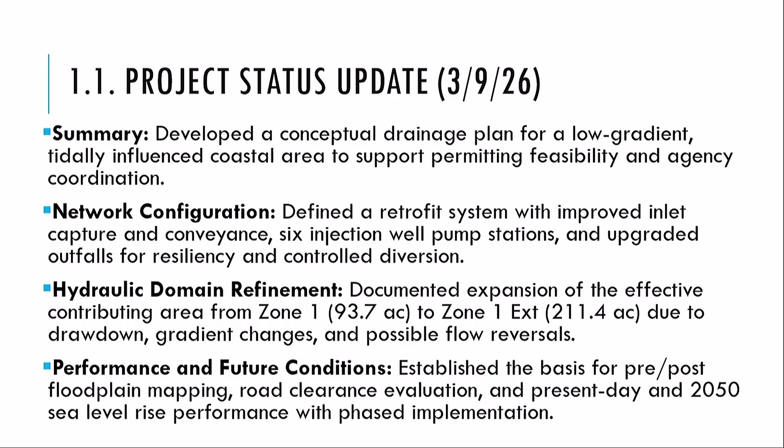And the model includes the tidal effects. The tidal complicates things, but it also helps—at high tide you have more flooding, but within less than 4 hours the tidal starts receding, which helps the drainage. So it does both things within 12 hours: it increases the flooding, but it also releases the flooding.

The project timeline, briefly: our ongoing tasks are currently the phasing and implementation strategy. This involves also constructability, how the phases can be managed, and we also started working on the cost management. The cost management, we have two approaches.

First, we needed to have more detailed information about the items that are involved, different valves, different pipes, different sizes, the dimensions. Right now we already have this information, and we are able to proceed with the costs.

And we have two ways to approach this. We can compare with the AECOM, the original analysis from 2024. Probably it's good to compare that as well, but we also adjust for the current prices. So we will end up with two sets of numbers, which are going to be time sensitive.

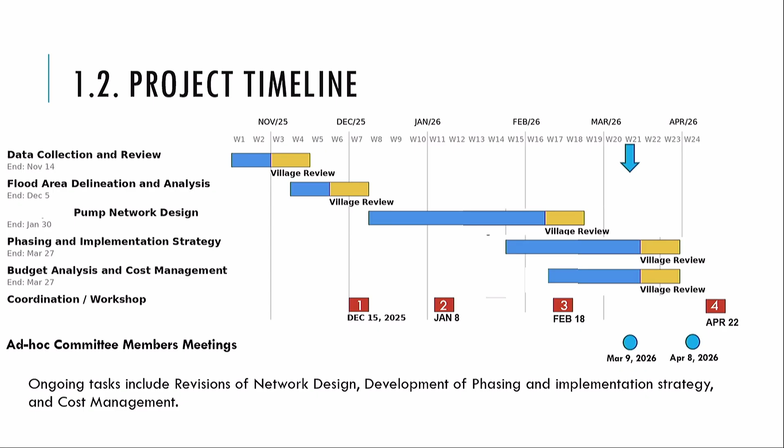We have another ad hoc meeting on April 8th, when we will be done with the cost analysis, and then the final presentation will be on April 22. So we're currently in these two processes, phasing and budget analysis.

One illustration I wanted to show you: there are multiple elements in this stormwater master plan. There is conveyance enhancements, collection improvements, where the catch basins and different inlets will be established. The inlets are typically connected directly to the stormwater system. A catch basin implies a sump, so it's a little bit bigger component.

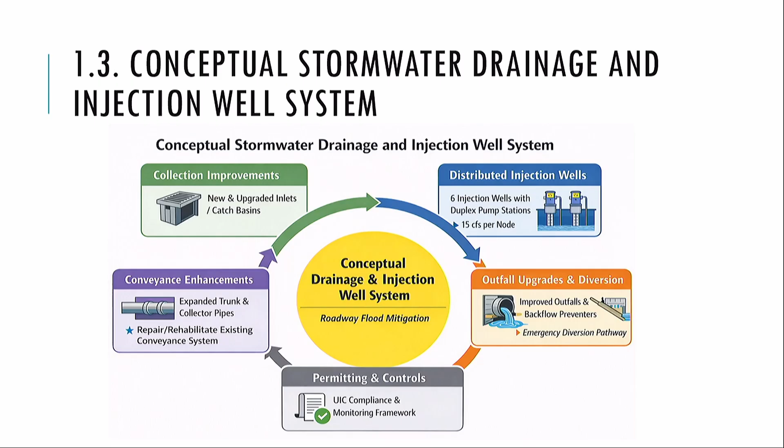There are 6 injection wells with duplex and pump station. We located them, we moved them around, we went and did a field trip, so we have a good understanding. The outfalls upgrades are optional, and we will discuss the aspect of these outfalls upgrades. But they can basically be used for emergency. We do not suggest that they will be closed, but they will not be used.

So there are four major program elements if we look at the proposed stormwater infrastructure improvement. One is to improve the existing or rehabilitate the existing system. This will require conducting a CCTV to assess the pipe system, see if there's any need for repairs, and also to repair deficient pipes, which can be repaired either through replacement or slip lining. Both have advantages and disadvantages.

Program element number 2 would be construction of injection wells. As you already know, they will be 24 inches in diameter, approximately 100 feet deep, and this can be phased or built in parallel, because they're in different locations, but they're designed to work independently. In addition to the wells, a pump station will be needed to inject the water into the wells—duplex pump, 7.5 CFS with total peak capacity of 90 CFS.

Program element 3 is to upgrade some of the stormwater systems. There's a minor number of pipes that are 12 and 15 inches; pretty much the standard is 18 inches, so this will be upgraded. There is a significant number of missing branches, which results in dead ends. These are indicated and located based on the survey. This will require also, because it improves the conveyance, adding catch basins or lowering them so that they improve the inflow.

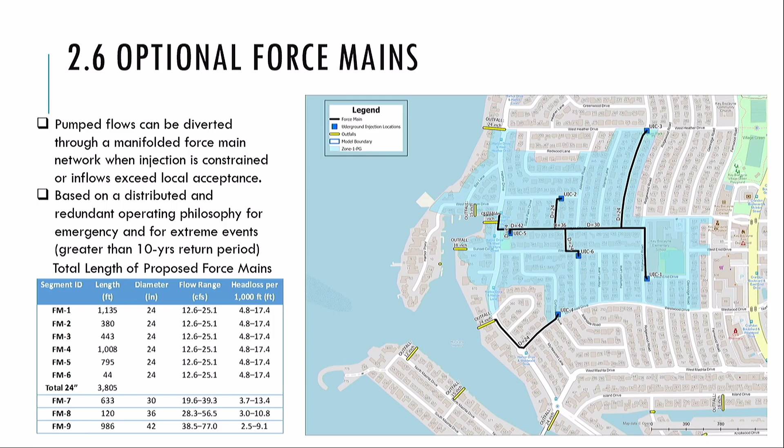So we have one aspect we're recommending for resiliency, which we call optional, but for emergency conditions - pump failure or something dramatic happening to the network - we're proposing force mains, which the pump can be switched to pump water into the outfalls. This is not part of the system, it's optional, and falls under long-term resiliency, addressing higher sea level conditions or much larger events, like a 25 year storm or a strong hurricane with much deeper flooding. They will help the system drain faster with the same pump.

We revised the layouts, and we probably will do additional revisions, but one of these wells will contain the hydraulic structure, the hydrodynamic separator. Inflow from the stormwater system goes through the hydrodynamic separator, then flows to the wet well. The wet well will be deeper, approximately 15 to, we have to finalize the exact dimension, down to 20 feet possibly.

The purpose of this is to provide enough volume to allow the pumps to switch less or be more efficient. We have 2 submersible pumps, and a set of shut-off valves and butterfly valves to be able to separate these. These 2 pumps merge into one single manifold, one single pipe, and we're branching out one that can be plugged and stay in the valve box, which will contain all of these appurtenances.

So this is not a small box, it's approximately 37 feet. The well structure, the hydrodynamic structure, is 8 feet for this flow rate. From here we will have flow to the pressurized well, and it will be pumped down. This is a smaller structure, like 8 by 8. All of this is underground, so there's nothing above ground except the electric panel, which will be placed above the base flood elevation plus some freeboard. The profile of this system is also illustrated here.

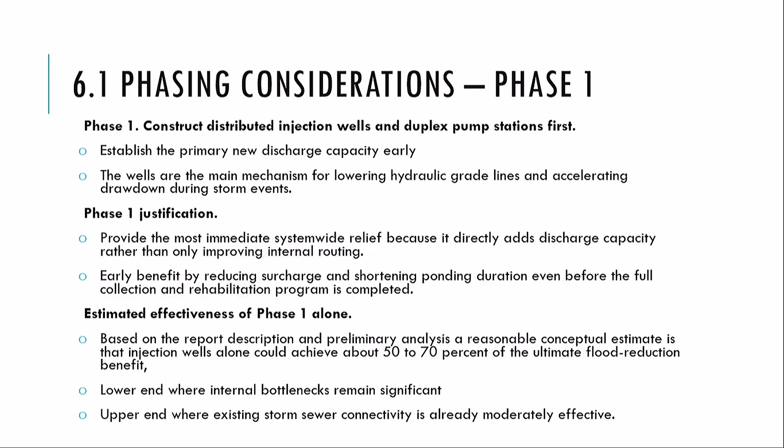What I wanted to make sure I clarified was, assume just for purposes of conversation that we did 3 injection wells, just 3. Would that system function standalone without the necessity to have the rest of the system built at this particular time? And will it meet the level of service that we have recommended?

So for the level of service in those particular areas, I think where you have connections and pipes and the appropriate infrastructure, it will meet the level of service. For example, with this UIC-2, let me point to the other screen. This is the well. You have a lot of not connected pipe. If you place this well here, you'll improve this entire area, but this will not do anything here. And around the school, if you place this well, you basically will not have much impact in these areas, mostly because there's no lines.

There is no line, so you can't do without the lines. You'd have to put the lines in. So it will cause improvement in these locations, but it will be limited.

I guess the simple question, and I'm going to try to translate what you're asking for, is: you're suggesting 6 different wells, ideally working as a complete network system where it gets its greatest capacity. If we were to choose, let's pick 2, one in the southwest corner of the school, and the other one in Harbor Park, would those be effective? And the associated pipes, obviously we're not going to put it there without the pipes. Would those meet the level of service that we've given you?

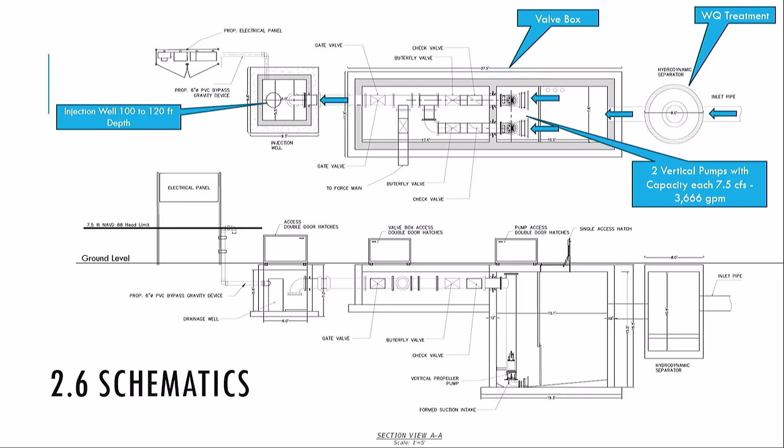To the left. The only thing that's above ground is that electrical panel. Do we know where that would be? Where those blue dots are on the network? Well, those blue dots, go back to show where they would be.

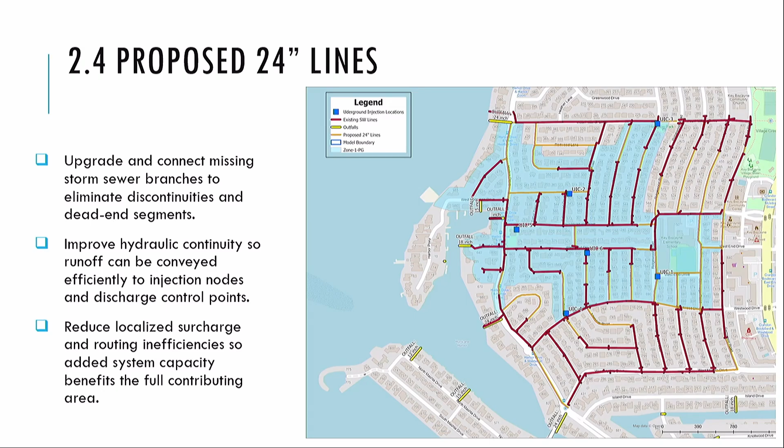Schematic drawing. Do you have a picture? Send it to Joe so we can see. Right there, what it looks like, it's all underground. I couldn't find my more detailed plans, but for example, this would be the location at one West End Drive, this is at the school, and that's how it will be in scale.

So they're very long, but they're underground and they can fit between the right of way, and possibly in some cases will be under the road when the right of way is very narrow. But this blue line is the right of way.

There the utilities are printed. Is the water coming into this box? Yes, it would come from this point and it will move through here and it will be injected at this point. So the water comes into the red thing.

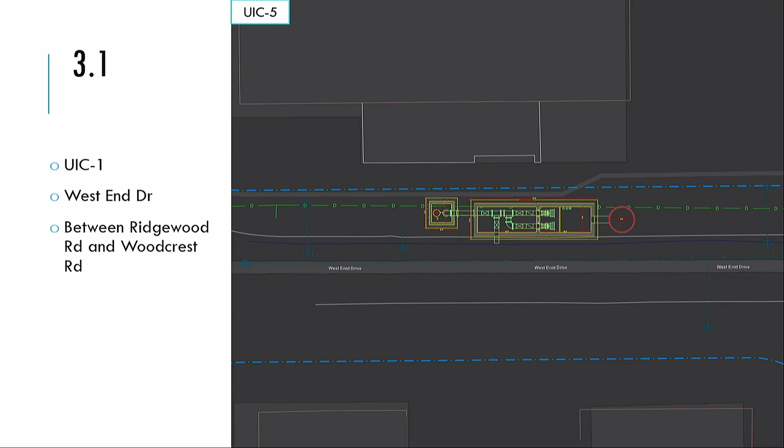So it's all sitting on a concrete slab below grade, under the earth, and it will go through there to your different distribution points. The idea is it comes into the red box, which is basically a device that sends the water in a round circle, drops the particulate to the bottom, that flows into the main body, which is like the sump pump, it's like the bigger, it creates the capacity, and then it pumps through there, and it goes to the well, straight into the ground.

That makes sense? Drainage, this is the drainage, and that's all underground. This is stormwater, that pumps underground as well, except for the electrical panel, and if we decided to do the generator over there also. There's a lot, Fernando has probably seen pictures, there's several of these in Miami Beach where these whole devices are on the ground. It's not an uncommon design.

I have another question. Can you include, or are you considering in your report to provide, the pump stations, et cetera, are you providing O&M costs for this system? Because eventually there's a life cycle maintenance component on this that needs to be taken into account.

Yeah, this will be part of the complex asset to maintain. It's part of the cost estimate, the life cycle cost. Do we have the same for the other program? Yes. Okay, to make sure we're comparing apples to apples, do you anticipate it to be more or less?

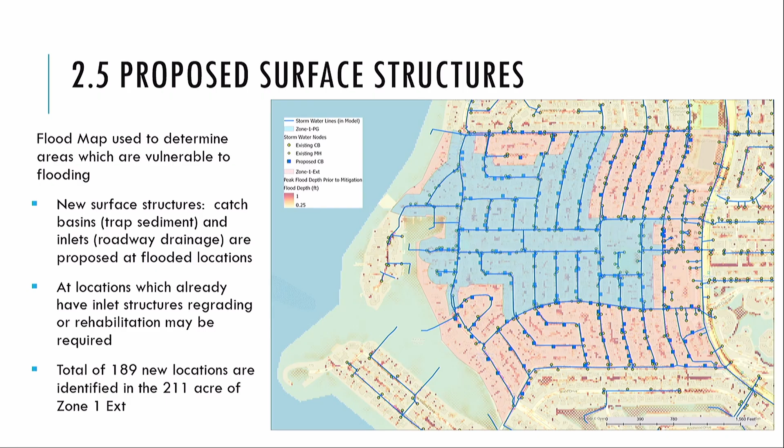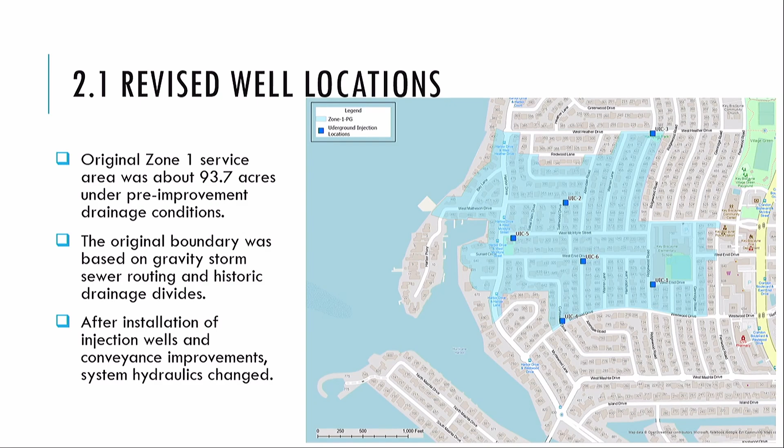So I think the question is, do we have to relocate the injection wells to cover this, or are the injection wells staying in the same place?

We started with Zone 1 and placed the injection wells in a certain location. We realized that we need approximately 6 to provide the coverage. So then we started moving them, and once we moved them to this condition, we decided, okay, that will extend.

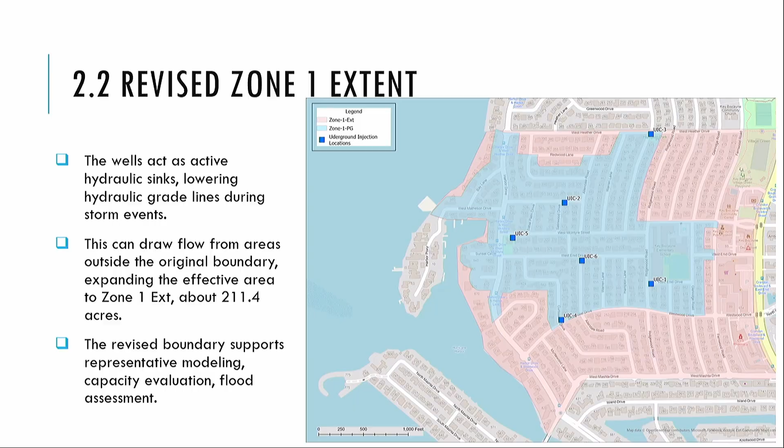The following optimization, I guess, is do we want to try to move this one towards here because it will provide better service? So that would be some kind of optimization, but we haven't done that.

So, yes, you moved them a little bit, or you haven't yet? We moved them a little bit, but after we moved them, then we expanded the zone and we keep them as they are. Fundamentally, we still have 6.

If I may, one more question I had related to the permitting. How many different components of permitting are we looking at here? Can you walk us through the permitting? Thank you. Yes, so there's two permitting agencies we need to deal with, one is Miami-Dade County.

We had a meeting with them. Their preference, of course, is injection wells because they don't want to have any discharges. They have very difficult times with a lot of outfalls, Miami-Dade County has 9,000 outfalls. I agree 100%, so for them it's a no brainer. The permit is going to be to provide this treatment for water quality.

Their requirement is to have this structure be there, 90-second residence time for the flow, which is 90 seconds multiplied by 15 CFS, approximately 1,300 cubic feet. So that was their requirement.

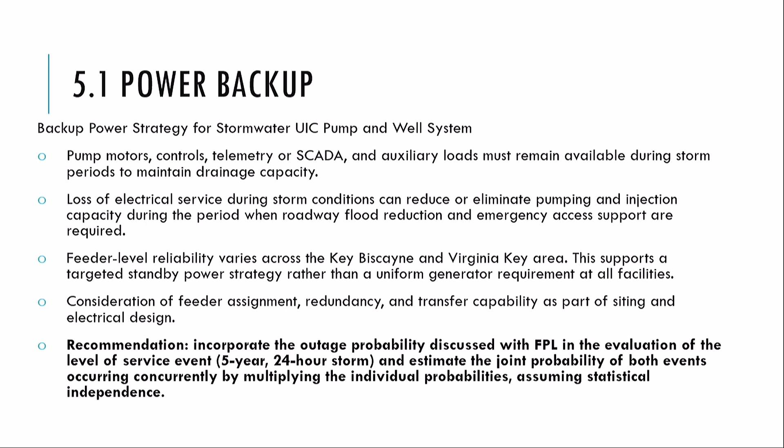So we're looking into that. Once we get an understanding, we're trying to do the due diligence to get the data, and then we can put it together and say, okay, this is your probability. I think it will ultimately be up to the council to decide whether we need it or not, because we can look at the risks this brings, or look at the probability.

We're not necessarily fans of it. I'm not a big fan because I've been dealing with the airport generators for a number of years, as my company does inspections there. I can tell you this is one of the worst places at the airport. There are 75 backup generators, 75 types of backup generators, and some of them are from the 40s. They're as big as this room.

They require fuel, and we estimated you need 300 gallons. Typical case scenario is 300 gallons of diesel fuel to be located. This one would be the appropriate size for 15 CFS. This is the type you could use. It's 10 feet by 4 by 7, so it's pretty large. Then you have to raise it up high, so it will become pretty much the highest point on the island if you do it.

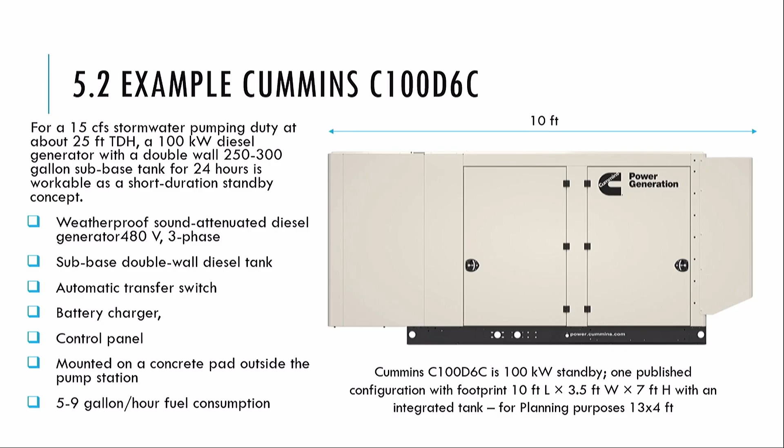Do we have 100 kWs? They're 77 kW, just slightly smaller. The next size up is basically almost the next size now. Similar, we know what they look like.

Does the county run them every week? They have to run them, but they cannot run them for more than 15 minutes. The only time they will run is when they're tested, and then you have to report them to the EPA as emissions.

George, doesn't the village have statistics as to how many times underground power has gone out? I know this year we had an issue with the feeder lines, but I'm not talking about this year. Before this year, I don't remember ever hearing about the underground power going out.

We met with FPL and asked them for reliability data specifically for overhead versus underground. They don't have as good data as we would wish, but they did give us general information on the reduction based on undergrounding. So they don't have the information tracking exactly how many times overhead versus underground outages occur. We asked them at the conference last time, and they basically said they don't have that data.

One more question: does the system work if the injection pumps are not working? No, it's very low efficiency because there's no head to drive it through gravity wells. It would have to be a lower pump, probably.

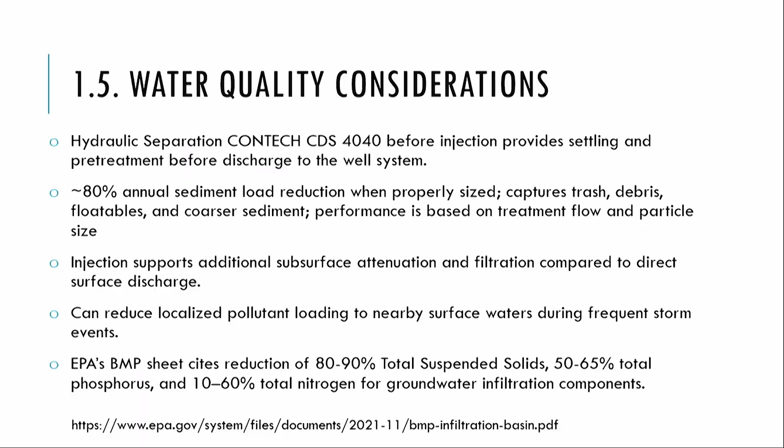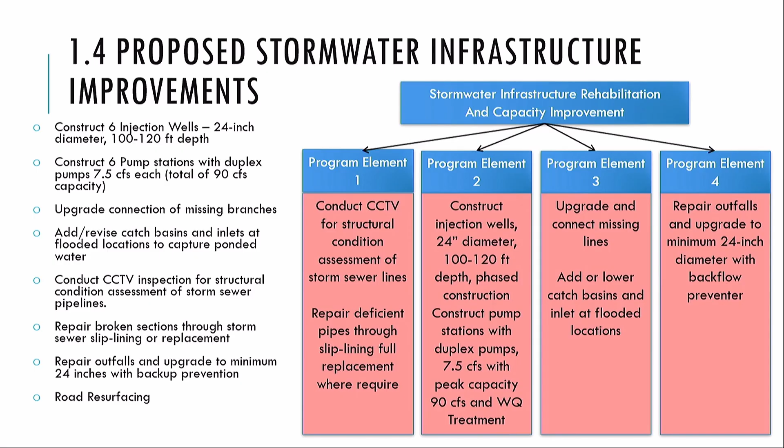Giorgio will do an analysis of what he thinks is appropriate, and then that will be taken into consideration. And Giorgio just asked a question, I just want to be clear. I'm clear, but I want them to be clear that program element 4 is outside the scope, and that would be additional capacity if we so choose to do it. Yes, that's the correct way to explain it, and again I would add, for emergencies and for extreme events, that would be the rationale for this particular item.

And you could tie that into the recommended system by pumping laterally instead of into the ground. Yeah, okay. Mike, so do we want to make sure that we have a number for zone 1, and then we have for zone expanded? Because those are 2 very different things. It is, and we need to see the hydrology on both of those as well.

By the expanded one, we're looking at a substantial potential savings over amortizing over a lot. And that's why we want to make sure that we're clear on this, because it will affect each one of these evaluation criteria, because it's additional cost, but it's also additional benefit.

Mike, we need to make sure we suggest that we do a cost per house comparison. Since every single pump is inside the existing zone, our cost in the pink area will not be that much, so the expansion may be well worth it if we do a cost per house analysis. But in order to compare apples to apples, we've got to make sure we just do zone one.

Am I correct that the expansion area will get some benefit, but it won't be the same actual level of service as the real zone, the original zone one? But ultimately, if we decide to do another zone, those areas would be brought up to the same level of service? Yes, that's correct. So for us to evaluate that, we need to evaluate it as a whole, and then evaluate zone one as a whole. They have different levels of service between them, and we can evaluate both of those as well.

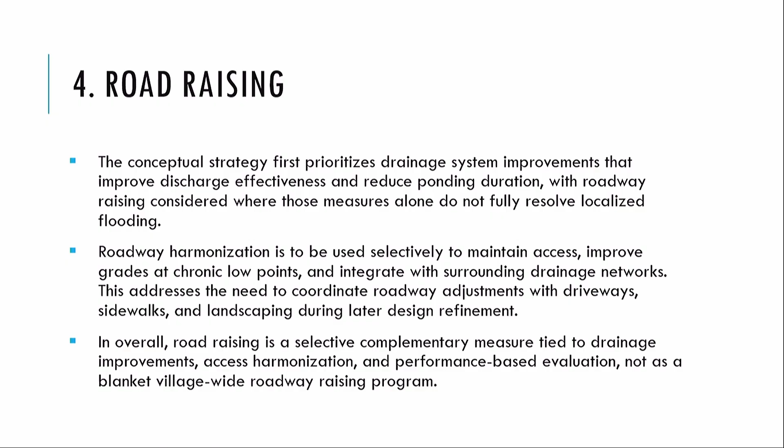So raising roads is a decision, for example, based on the hypothesis that sea level rise is coming up and going higher and higher. So adaptation is a consideration for raising roads - adaptation for future sea level rise, and you might as well raise it with one foot. I believe the AECOM plan was raising the roads to 3.2 feet. Not that much - I saw different documents, maybe it was like 24 inches at most of the high parts, and those were intersections. But a big part of it is because they also included the black base system stuff, which allowed it to reduce the height of the road raising.

But there's also, Mike, a substantial amount of cost of harmonizing - it was also expensive, that was a very large part, because now you have driveways, landscaping, harmonization - massive. They were digging up the roads, putting the pipes in. Exactly, this is direct boring underground. So obviously you're not going to repave all the streets.

But guys, when we're talking about road raising here, we're probably not using an adjective that is appropriate, okay? Because what I believe Giorgio is discussing is that we have to do some modifications to the roads in the areas of the catch basins to better make those catch basins efficient. He's not talking about going in and repaving entire streets.

He's talking about going to specific catch basin locations and saying, okay, what do we need to do to make these catch basins more efficient? So let's make sure we're talking about the same thing.

I want to make sure though that what I hear the mayor saying is, if AECOM says we have to raise it so high, how does his system not have to raise it so high?

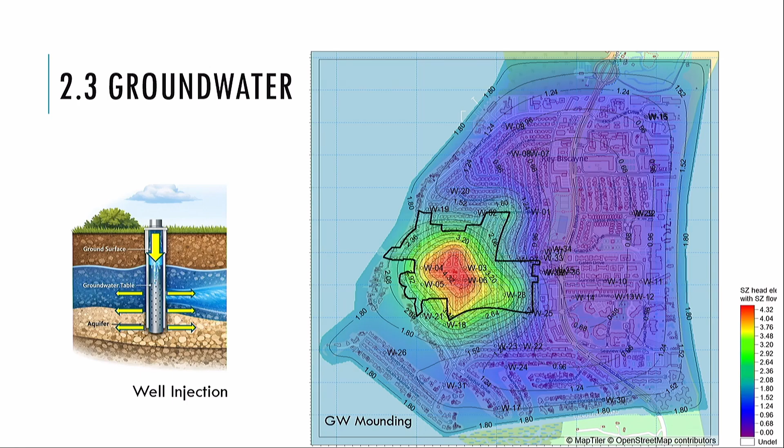So, is that, because I think, you know. No, that's perfect, that was the one. Okay, what is the lowest elevation in that polygon? In that polygon it's 1.5.

The surface, where? Oh, it's all over the place where you see roads. They're at 1.5 on the roads, because the parcels are there. Most of them are built, but the roads are the lowest. Basically, the right of way is the lowest point in general.

Except for Eric Lang's house. No, Joe's house. No, actually Eric's is lower. Eric's is lower than Joe's house? It is, Eric's house is lower. Yeah, because at least the mayor kind of built it up a little bit, with a berm in front. He's got a berm in the back. He just can't get out of that driveway until the water recedes.

Go ahead, Mike. Okay, so what we want to do is go through these quickly. We'll talk a little bit about the subcategories, and then I want to elicit your response and your feedback, with the understanding that in the next week or two we can have this finalized so that when we get the final report, we can go ahead and do these.

Councilmember London is not here. I think he just went to the restroom. Okay. All right, you got one?

I think the first one is pretty self-explanatory, we kind of already talked about it: technical performance. This is the technical performance of meeting the criteria that has been requested. So we understand that AECOM was for a 10-year storm, for 2060, for NOAA intermediate high. Giorgio's has a different design criteria. The idea is, does it meet that design criteria, how well does it meet that design criteria, and then how well can it be adapted, how well can it be phased? These are things we're looking at. Some of these kind of cross over, but it's going to be how well does it work.

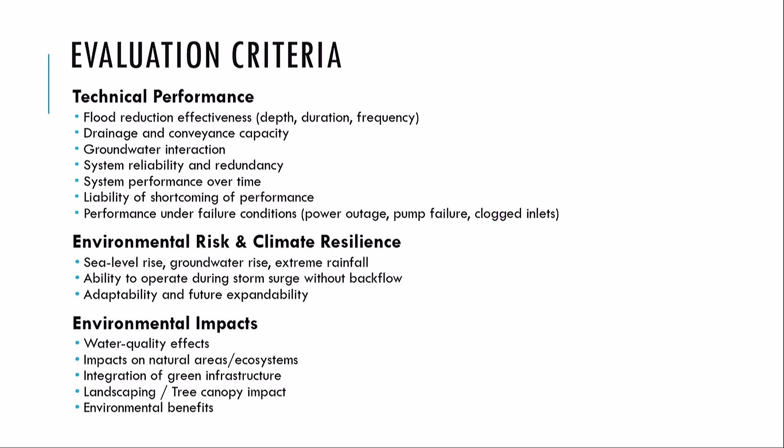The next one will be environmental impacts. We've discussed this at length - water quality, landscaping, nature in the village. And I think we have one, for example, effect to the community. Yeah, we'll get to that later. So we'll just go through these real quick, and then we can discuss any of them specifically.

Constructability, regulatory compliance - this is how easy is it to construct, what are the hurdles that go through it. We know that both of them have different challenges. There's actually phasing, feasibility, utility conflicts, a number of easements, land acquisition - we've gone through a number of these. Cost - this one is fairly straightforward, but we want to make sure.

As an example, let's just say constructability. Based on your understanding of these current two designs, which one is easier to construct when it comes to digging up the road?

There's the one that has a lot more building of roads. It has bigger pipe, it has bigger trenching. So the closest relationship to what the community has seen before when it comes to

this type of work, civil works, was the sewer piping system that we put in about 12 or 15 years ago, where we had holes in the roads that were 12 feet by 20 feet deep and plates over streets for literally a couple of years, okay? That's what you're gonna see.

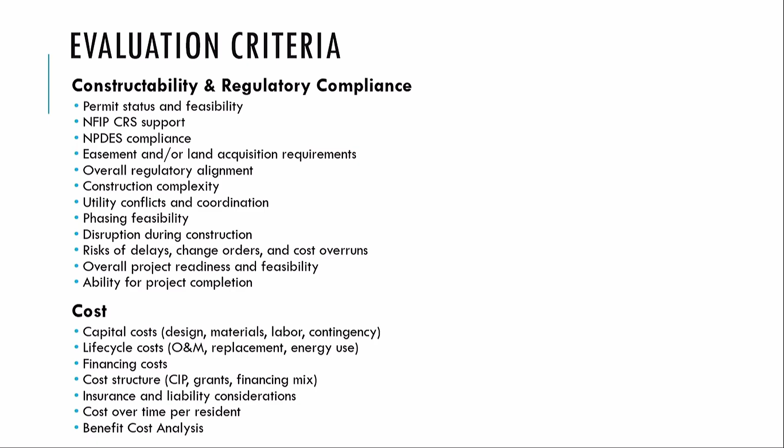And Councilman, if a pump was... okay, we've got the components up there. O&M replacement, energy, so that is a time component of life cycle, which is different from the next one, which also has O&M cost impacts, but also staff capacity, design life, maintaining and storing equipment.

So you can look at it analytically from both sides. And we purposely divided cost and funding apart, because cost is how much does it cost, and funding is where we're going to get the money from. Although it sounds the same, they're two very different things, because there's a whole cost funding structure you have to put in place in order to pay for those costs. And then not only how would you pay for it in the moment.

In most cases, this is going to be a loan, a grant, or a bond, and therefore we'll have to pay for it over time. And so that's also important as well. That's a big discussion because there's a whole other role that plays into it.

I think we've got to be careful with this conversation about whether we're going to use stormwater utility funding, or the special grant program we currently have, the Clean Water SRF. We have the SRF program, but we haven't applied for the SRF program for that. It's still applicable, we can apply for an SRF loan for either one.

So what I'm trying to be careful with is we can't say, okay, well, we have SRF funding for this particular project, but we don't have SRF funding for that particular project because we haven't applied for it. So we don't really know, it's not really fair to compare the two in that fashion.

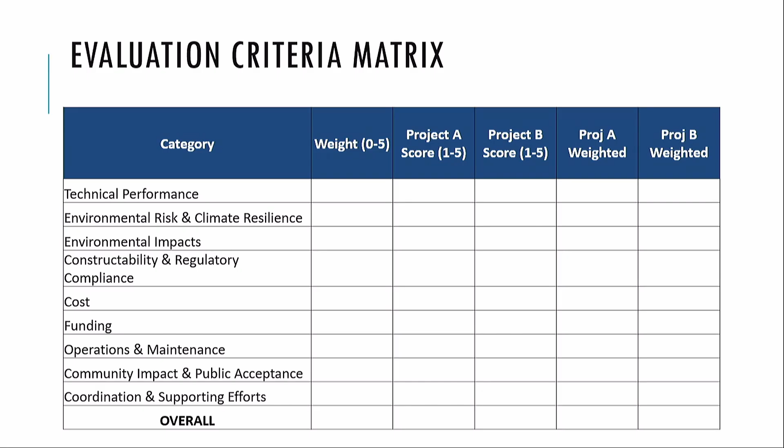So you look at environmental impacts, I guess that's dumping the water in the bay versus dumping the water into the ground. That's a big portion of it. So as a result, how would you put a weight on that? For a lot of people that's a no-brainer no matter what, they make that a very high weight. Other people don't put any weight at all. I'm just saying, for a lot of people, not everybody, these are various criteria and how you actually put a weight on that.

That's our job, that's the subjective part of it. But that's how we work it out as a council, as a collective, saying what's most important to us. I'm gonna give you all the analytical data, all the different criteria.

It's what the average person... but there's also, I mean this, I'm not sure we can spreadsheet it all. If we say right now it's a 1 out of 5, you know, it's 1. Now if we end up making it a 4, obviously those numbers change.

Then we look at technical performance, your first criteria. We have to assume that AECOM has analyzed this, their pump system, the size of the pipes, the location of the manholes, and all the other things. We have to assume Giorgio has done the same thing with a different system. So how can we determine which has better technical performance?

Okay, can I just say a couple things on that? You go through all these different samples, and maybe I missed some. It's a reasonable question. And maybe there's some, yeah, right, that's why we share this. If there's something you think should be on here or shouldn't be, I'm just saying, there's probably some that are a little repetitive. I'm sitting here too saying, okay, how do you change the technical performance?